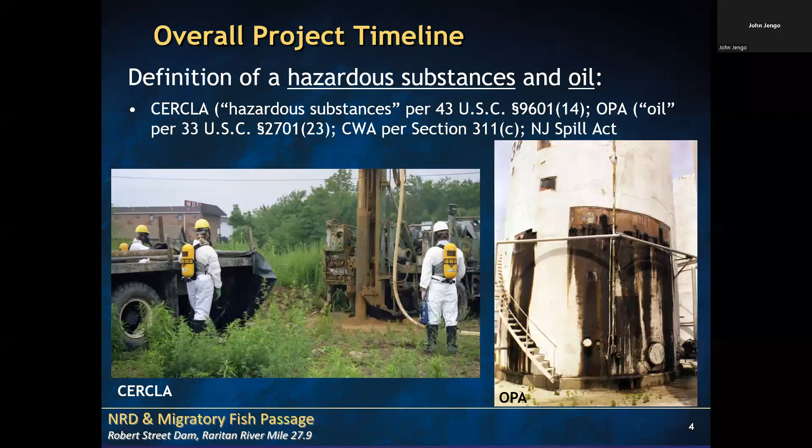So after about 10 years, and all you folks on this call have done this work yourselves, you know that if you've been investigating a 1,000-acre refinery or a 350-acre chemical plant, you know about 10 years in what your problem is and how you're going to resolve it.

Starting 10 years later in 2002, the remediation of these industrial sites began, which included finding thousands of drums still filled with tars and acids, shown to the left, and USTs to the right.

Drums that were burned and then buried, LNAPL, and also remediation trenches that I built and designed that separated the sites from the sensitive receptor. So now you're starting to get site containment.

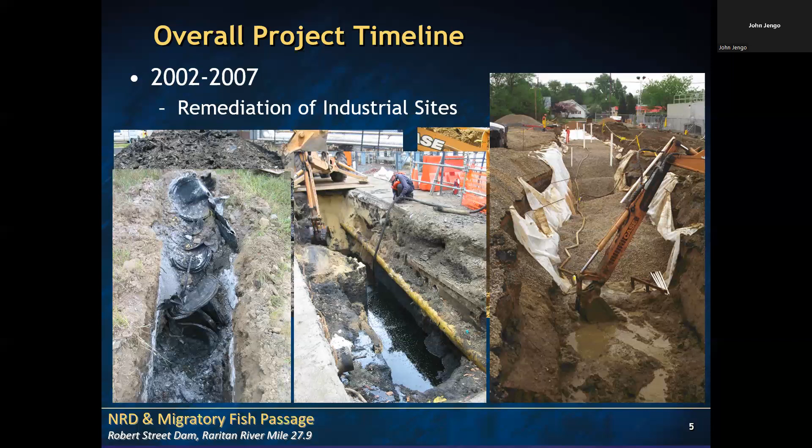It's only after you achieve that you really can calculate NRD. I've inserted these three images here to give credit to the team that has helped me in the first 15 years of this work.

To the upper left is Suzanne Eckel, to the right is Bren Welker, and to the lower left is Sophia Lee. These young women helped me enormously doing much of the field work as I worked with them. Without their work, none of this would have been possible.

I'm very gratified to say that each of these exceptional individuals still work in this business, but have gone on beyond my shadow and started careers running projects similar to these on their own. In fact, Sophia works for a major oil company, and Bren and Suzanne are project managers at highly regarded consulting firms.

So before I proceeded, I wanted to make sure no one person does this work. If you don't have a good team with you... I happen to be very fortunate with these three young women, who were equal members of the team and performed very arduous and difficult tasks. A lot of the success of the investigation and remediation were due to their efforts.

So about 2 years into the remediation, in 2004, I knew enough about how long that remediation would take so that I could calculate the natural resource damages. One thing about natural resource damages is it's ongoing right now, but you can't settle it unless you know when it's going to end, when the injury is going to end.

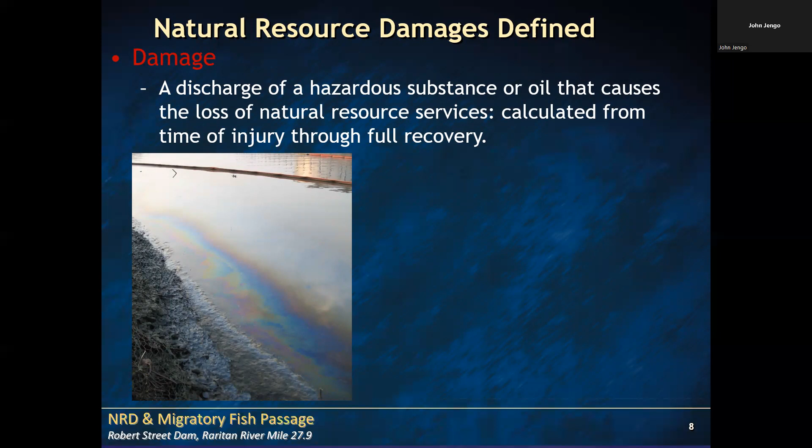But as a thumbnail, you start with the number of acres that were affected. Over time, that acreage increases in terms of what you owe the public. So if you injured 20 acres in 1915, you don't owe the public 20 acres in 2022 — it accrues over time. In this particular case, it was 383 acres owed back to the public, even though it originally started as only a 20-acre injury back in 1915.

I'll probably do another presentation someday on how complicated this formula is. But when I calculated this NRD, the federal and state trustees and I agreed that this was fair compensation.

So just to give you an example in acre currency: let's say 20 acres of wetlands were damaged in 1915. If I build or restore 383 acres today, that's compensation for the fact that those 20 acres of wetlands had been injured for almost 100 years. So time is a parameter in NRD.

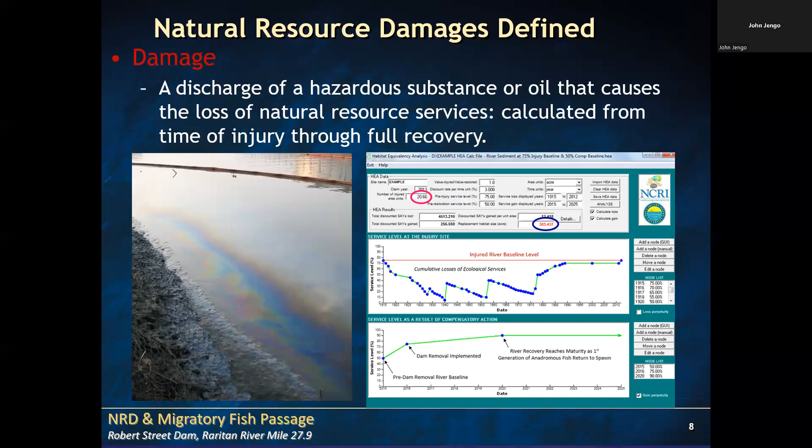So I wanted to get that out of the way because you may be wondering what that does have to do with dam removals. I had to give you the context of why these projects occurred.

In 2008, I spent almost the entire year, after we knew our sites were going to be remediated, trying to figure out the three NRDs, how we were going to compensate the public for this loss. For groundwater, the primary option is to purchase uncontaminated land and put it in easement. It recharges clean water in the same supply area as the contaminated site, compensating for that contaminated groundwater. The example I showed is that if we damage 20 wetland acres in 1915 and I restore 383, that's the primary way you compensate the public for wetlands loss.

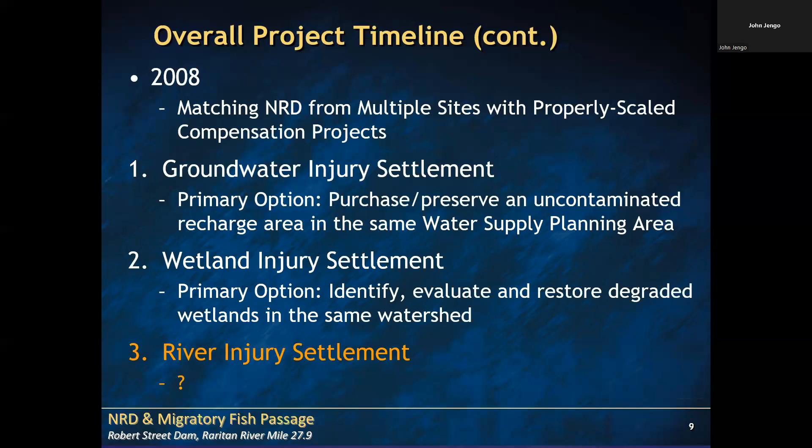But the river, this was a real puzzle to us. How does one settle a river injury? In 2008, nobody knew how to do this.

So I sat down with DEP, U.S. Fish and Wildlife, and NOAA and said, okay, my client injured this river in the 20th century. It's clean now, sediment's been remediated, the site no longer discharges. But I had 80 years, 70 years of damage, of discharges into this river of untreated chemicals. How do I possibly compensate the public for that injury?

We decided that reestablishing anadromous, which is migratory fish passage in an unobstructed river into their historically significant spawning grounds, would be the action that would provide the greatest uplift. It turned out that dam removals would be the mechanism to restore a river and get that ecological uplift. In the next slide you'll see that the dam miraculously disappears, and in theory, migratory fish would return.

So here's some interesting quotes. If you're not familiar with dams, we all know the benefit of dams. Why? They generate hydropower. They might be the place where your water company extracts water from. They might, in the west, not the east, serve some function of flood control. But they do more damage than good. Most dams do more damage than good.

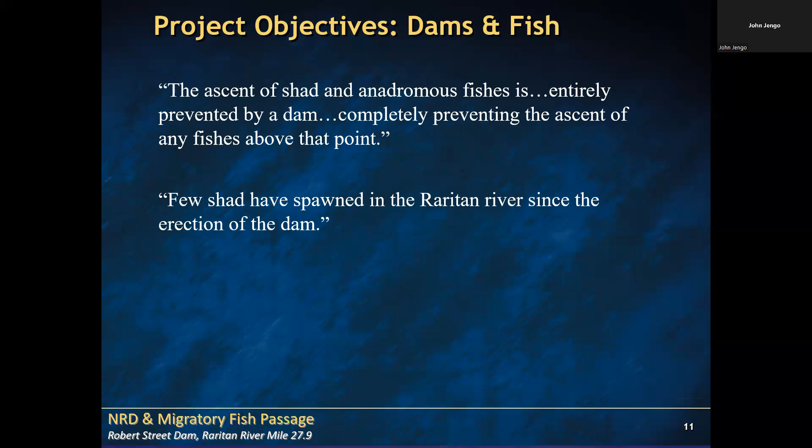So here's an interesting couple of quotes from a report. The ascent of shad and anadromous fishes is entirely prevented by a dam, completely preventing the ascent of fishes above this point. Few shad have spawned in the Raritan since the erection of the dam. The chief cause of the local extirpation of fish is the erection of dams impassable by anadromous fish returning through their spawning grounds. Now, you might think this was a report I wrote in 2008 justifying dam removals.

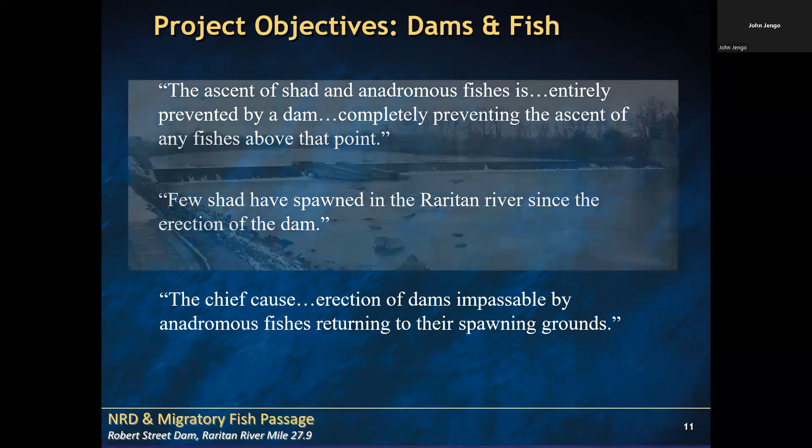But in fact, these words were written about this dam in this report from 1872. So it was recognized 150 years ago, the negative consequences of dams.

But in the industrial rush to improve life for the citizens of this country, dams were built almost without thinking. It's been said there's been a dam built every day in this country since the signing of the Declaration of Independence. The number of dams, depending on how you define a dam, whether it's a weir, or 5 feet high or lower, there's been at least 350,000 dams in this country and perhaps over 1 million river obstructions, which include culverts.

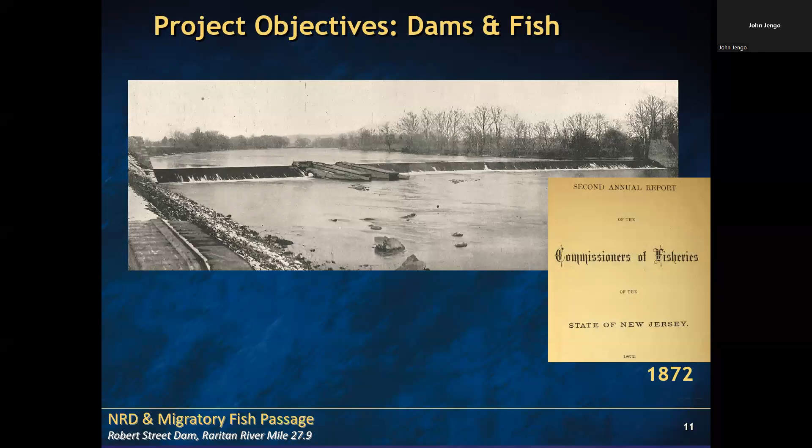So what are the advantages? How did we justify to the trustees that a dam removal would do the thing they wanted, which was to compensate the public, the citizens of New Jersey, for the damages from my client's sites?

And then the next animation.

Number two, you restore the river's processes for natural deposition, its flood flow and its water chemistry. You no longer have deoxygenated impoundments, but you have high DO water, flowing water that is not accumulating a lot of phosphates and nitrates in still water.

Next animation. You're also, when you clean that river and get that river flowing again, you restore riparian habitat and increase biodiversity. I can tell you that every time we took a dam down, the birds showed up that afternoon watching us, wondering if it was finally going to bring the river back to life. We've noticed almost a tripling of bird populations in the former dam impoundment since these dams came down.

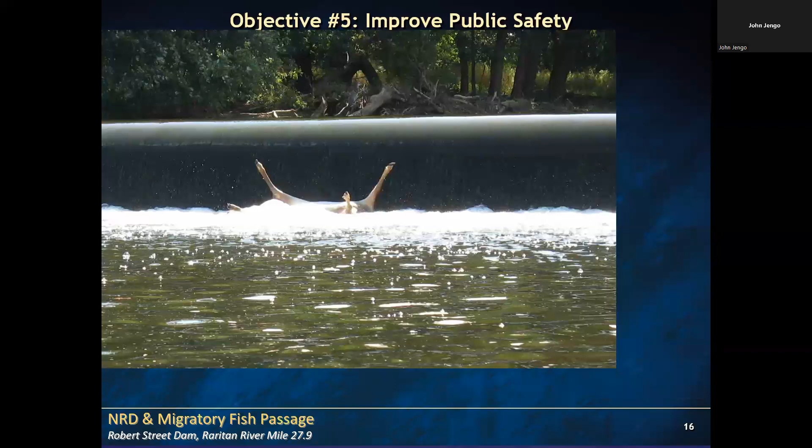And then lastly, this dam, the Robert Street Dam, which we're going to talk about in just a few minutes, had a number of human fatalities during the time I was studying the dam and when it was rebuilt in 1964. And then this deer went over the dam one morning that I was there, and there was no saving it. So this is a good example of these low-head dams being drowning machines, and it's very difficult to extricate yourself. The dam I'm working on now had 7 fatalities. The Robert Street Dam had 3. Some of the other dams I took down had at least 1 or 2 fatalities in the historical period. So we are also improving public safety.

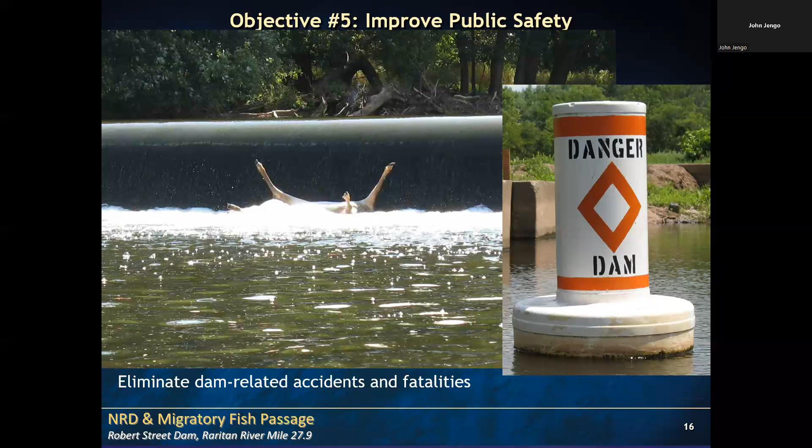Next slide. So where are these dams? The 4 that I've done and the one that I'm working on now.

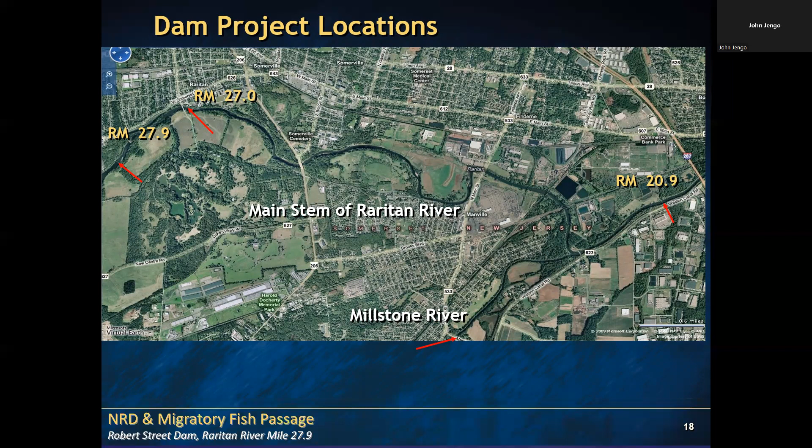So the first dam on the Millstone River was the Weston Mill Dam. You can see a picture of that dam to the upper right.

The lowermost Raritan Dam was the Calco Dam. It was actually a weir built by American Cyanamid to discharge waste dye into the river, but it served both as a dam and as a weir.

This is the Nevius Street Dam, built in 1901 by James Buchanan Duke of Duke Farms. He built it to run a power station, which is just out of frame of the picture.

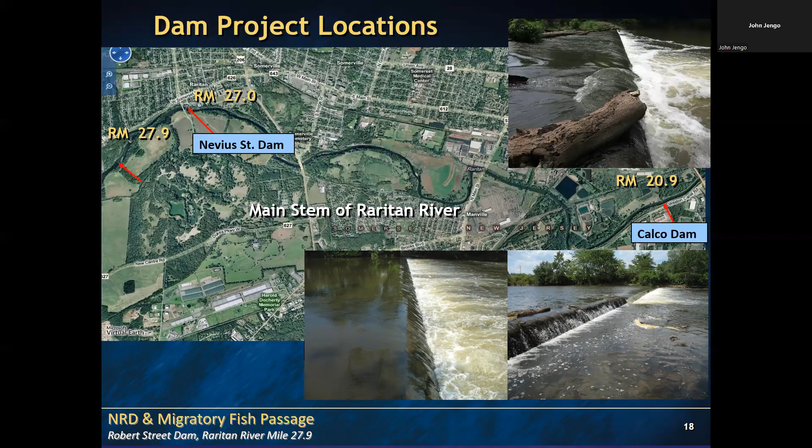And then the topic for the rest of this afternoon will be the Robert Street Dam here. There's also a Headgates Dam, off frame to the left, that I'm working on currently. So I'm going to show you the status of each of these 4 dam removals, but we're going to spend most of our remaining 30 minutes on the Robert Street Dam, to the lower left.

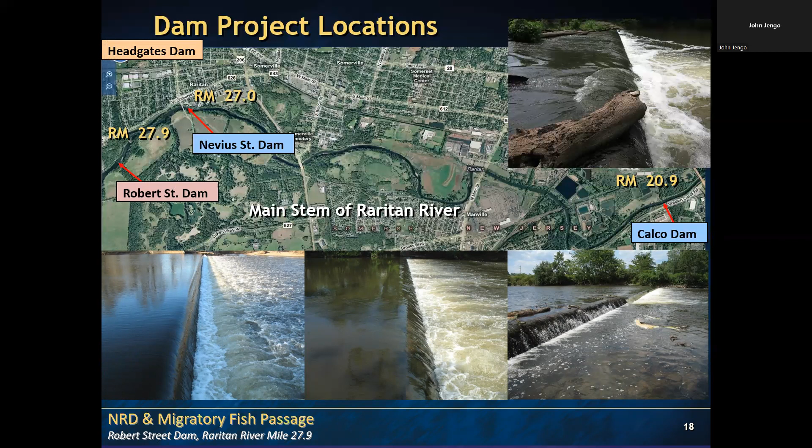So I just want to give you a snapshot in these slides of what the last 5-year process looks like. In year 1, you're identifying the dam, trying to figure out who owns it, which is trickier than it sounds, and also trying to figure out whether it's feasible to deconstruct it.

In year 2, you're spending a lot of time monitoring the river. You need to know its behavior to try to pick a time when you might be able to do the demolition. You're also sampling sediments behind the dam, surveying the dam, and surveying the riverbed at this time.

In year 3, you're doing a lot of your analysis. You have to notify every landowner on the impoundment, which sometimes can be hundreds of homes. You're also modeling the river because you have to figure out the ideal flow to breach it.

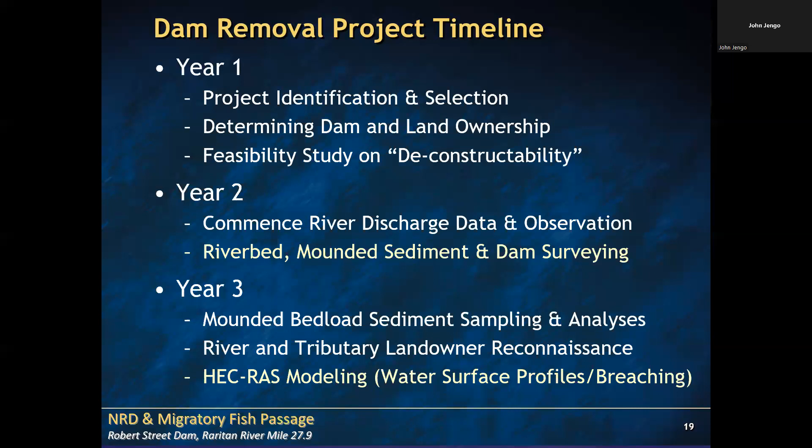One does not breach a dam on any given day. You want to breach it at low flow condition to minimize sediment moving through the breach, and to make it safe for your contractor to be in the water. The modeling involves building a model of the dam and river that predicts how much sediment and flow goes through when you breach it.

Year 4 is about getting agreements with the dam owner. Sometimes I have dams no one wants to claim ownership of, so we make them sign a quit claim deed saying that even though they claim not to be the owner, we think they are, but they must allow us to take down the dam and not make us put it back if it turns out they own it. We do this because no dam owner wants to be on record as the actual owner, since they understand the liability.

You're also trying to figure out how to get to the dam with 40-ton equipment. And of course, as in all your projects, you're applying for permits, doing public notices, and doing historical research in that year before the demolition takes place.

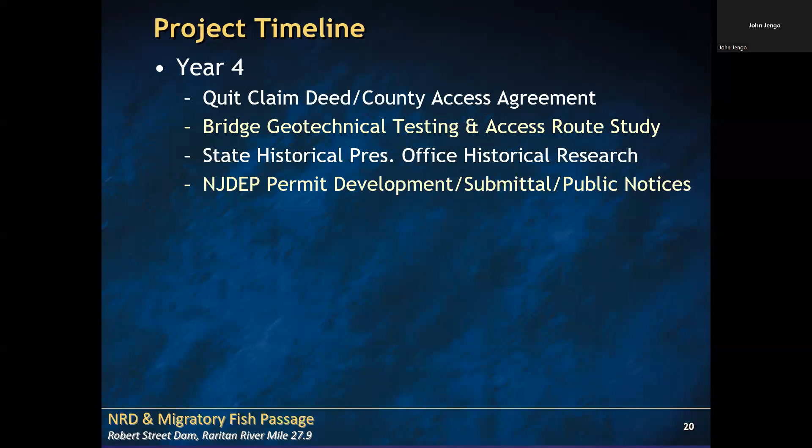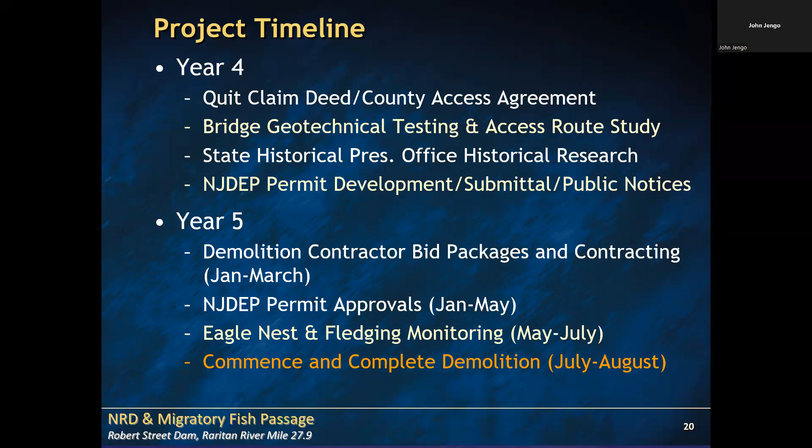In year 5, you're bidding out your contractors and getting your approvals. Many of my dams have an eagle nest nearby, so we have to make sure the eagles fledge by mid-July, and then the demolition typically happens in year 5.

So now we finally get to talk about the dam I wanted to show you today. This is the Robert Street Dam, actually called the Dead River Dam when it was built in 1915 because of what it did to the river. It was somewhat robustly replaced in 1964 when the dam failed.

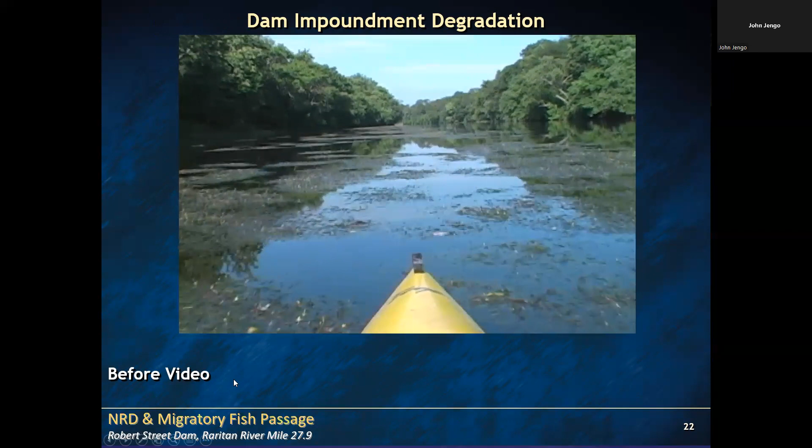This is me in the impoundment of the Robert Street Dam a year before the removal took place.

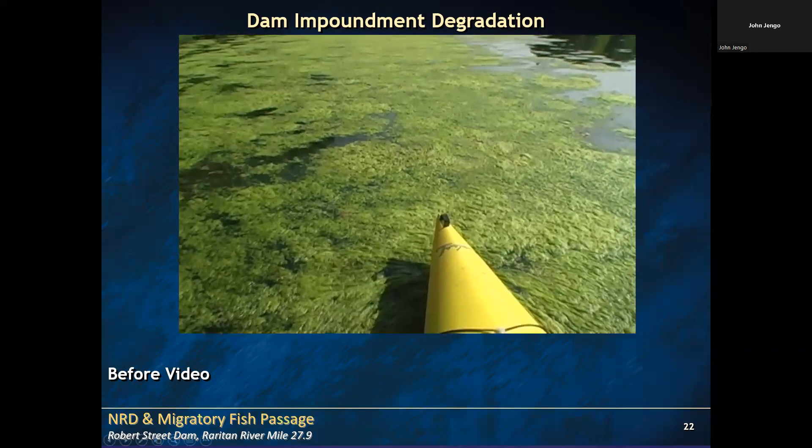This is what's covering the surface water right now, filamentous and other mat algae. This is simply not a very healthy condition for a river to be in. This literally didn't flow, and it got carpeted with this algae. What you really want, and what fish really want, is open water like this.

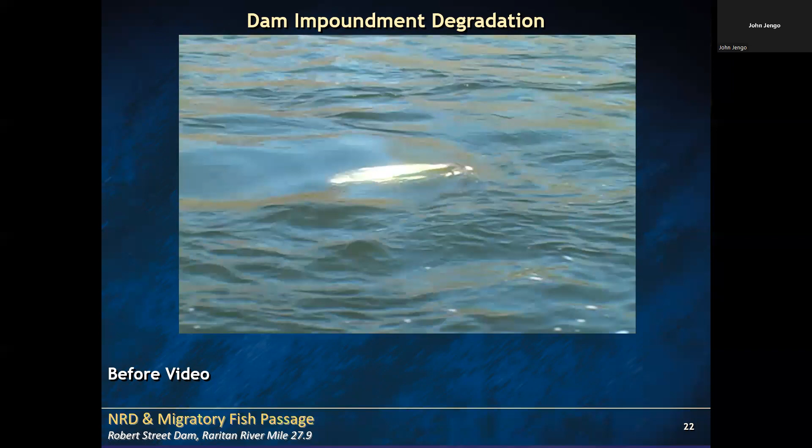In this last video, look at the bottom of the screen. You'll see a shad attempting a jump, though it didn't play very well. Many shad would get up to this dam and not be able to crest it. Shad cannot jump over obstructions this large.

In trying to figure out how to take down this dam, you try to acquire as much information as you can. There are really no as-built plans for dams this old, so you're doing a lot of surface observation. I also cored the top of this dam to try to figure out what was beneath it.

Of course, you can make a lot of observations when looking at the dam. I found a picture from 1964 in a newspaper of what the dam looked like, which told me a great deal about how they built it.

I could walk out onto the dam at very low flow and see a cutoff wall on the upstream side, a series of sheet piles. That told me we had a big challenge in front of us, because all of those sheet piles would have to be removed. We had no depth information on these sheet piles, but we knew they probably went down into bedrock.

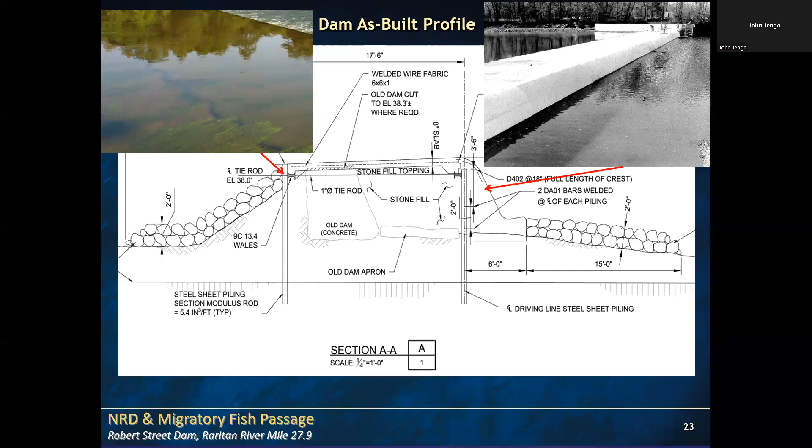This is a picture from a consultant report I obtained from a consultant, from 1963, of the original dam, the Dead River Dam, that had sunk and failed in 1963. I could tell, even in a picture of this quality, that it was also a concrete dam. So that prepared me to do a double dam removal.

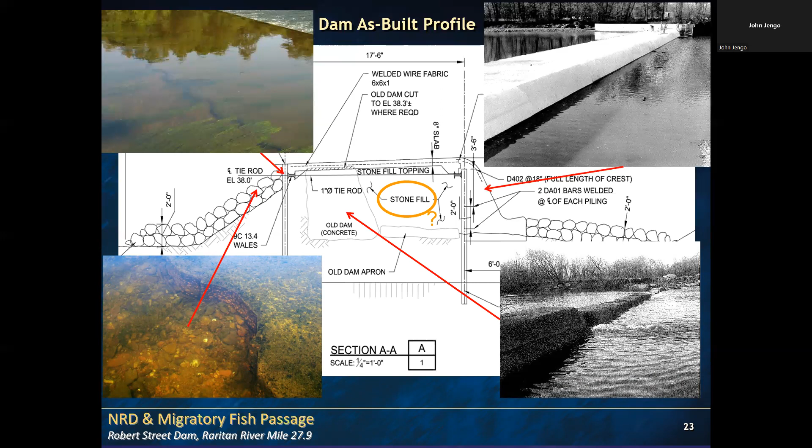I could see where riprap had been placed on the backside of the dam to ramp up and get water over the sheet piles. But there are things you don't know. No one could tell me the composition of this stone fill, so I had to be flexible as soon as we broke into it, deciding what to do with it.

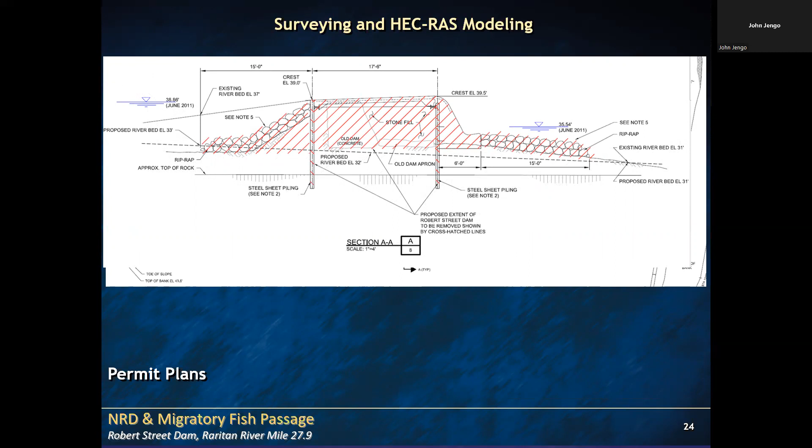I did a cross-section profile of that same cross-section to show the agencies what I was planning to remove and the grading I was going to do through the dam.

The river surveying you do upstream and downstream of the dam tells you where the river thalweg is. It no longer exists at the dam, but it tells you how to connect the two thalwegs together to reconnect the river. That's why you survey the river up and downstream, to figure out the geometry of what it used to look like so you could recreate it when you remove the dam.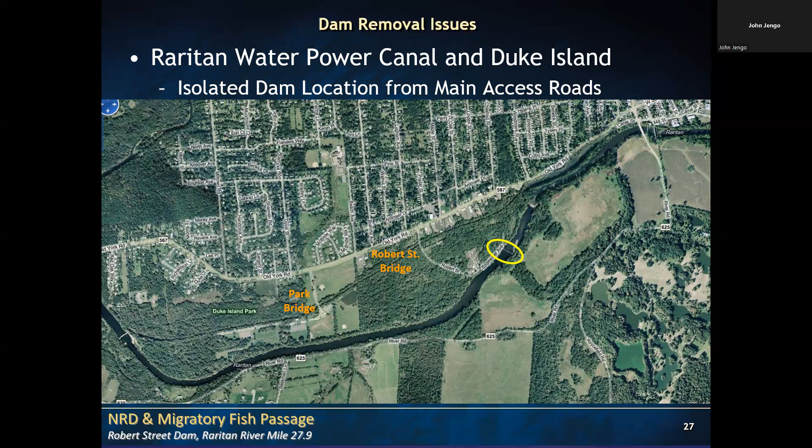Unluckily for this dam, there was virtually no way to get to it. There was only one road, where you see Robert Street Bridge, and this bridge was not capable of supporting the load from our equipment. Getting to the dam—I know this might sound odd to say it's in a remote location in Somerset County, New Jersey of all places—but there was only one direct road to get here, and we couldn't use it for reasons I'll explain next.

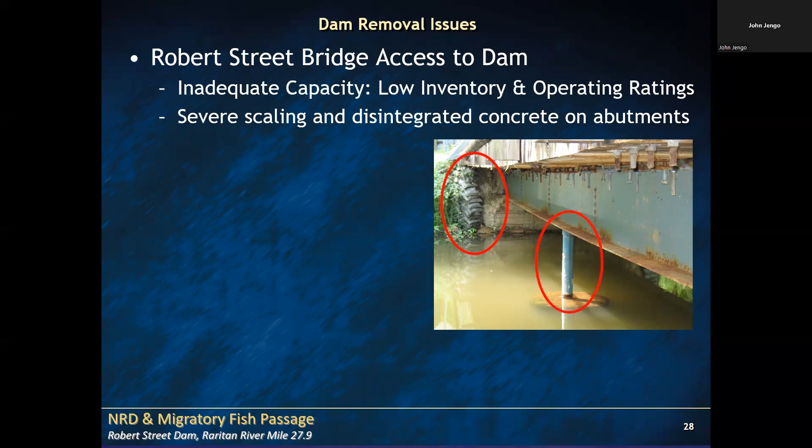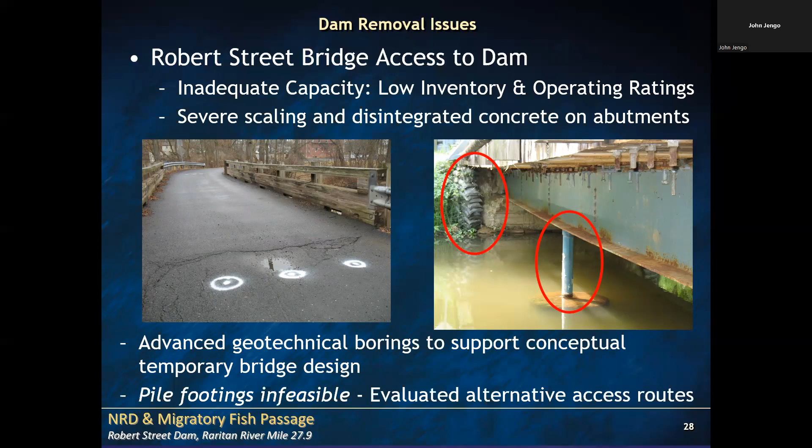So this was the bridge. I'm not an engineer, but one look at this and I realized there wasn't any way this bridge could hold a 40-ton excavator. They were sandbagging the abutment, with a hollow metal pipe on a concrete pad—which, by the way, this is a canal—that wasn't even attached to the base of the canal. I did a lot of geotechnical borings here and realized this bridge could not hold the weight of the excavator. So now I have a problem on my hands.

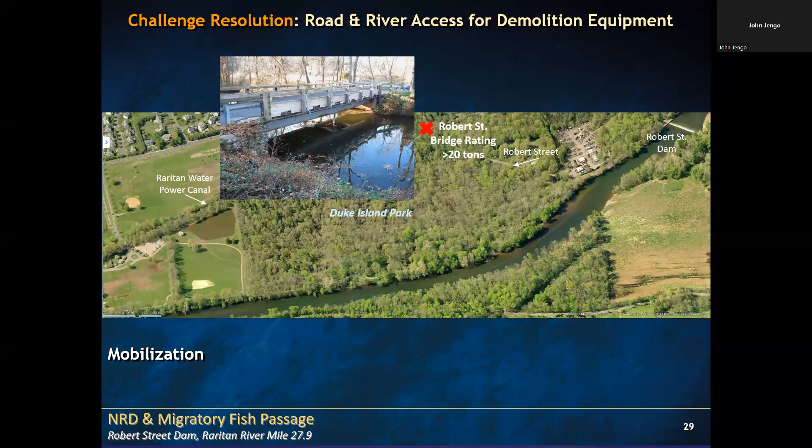I've gotten permission to remove the dam, but I have no way of getting there. I've already shown you this bridge, which can't be used. You might think about the real estate next door on the other side of the river, but there was no road. The bald eagle's nest was there, and we'd have to cross under PSE&G power lines, which they would not allow us to do.

Luckily, there was another bridge in Duke Island Park that was rated for 63 tons. So I was able to take that, and this was all pre-planned. I'm showing you the end result: we were able to ride the excavators down the pathway.

Where you see that yellow arrow stop, you might be able to look in the river and see some brown sediment on the north margin. That's actually a sandbar I surveyed over many months, and realized that at a particular water depth, our equipment could ride on that sandbar and get past that pedestrian bridge, which was blocking our way, and get to the dam.

And that's what it looked like. We made it by a few inches. I walked ahead of this excavator and said, if you see the water go over my head, don't stop. We were able to do this—you normally don't approach a dam on the impoundment side because the water is too deep.

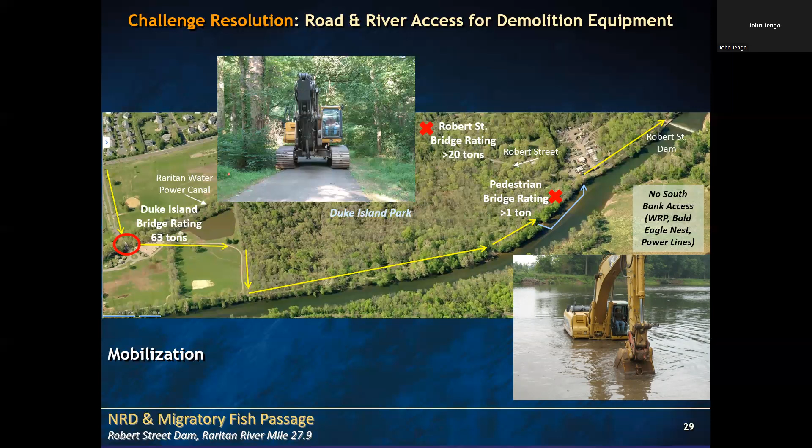I'm going to return to this sandbar later on to show you what became of it. But I just wanted to illustrate that every dam removal has challenges, but if you work a problem long enough, you'll be able to come up with a solution.

Now we get to the fun part, the latter portion of our presentation, where we talk about how the dam removal happened.

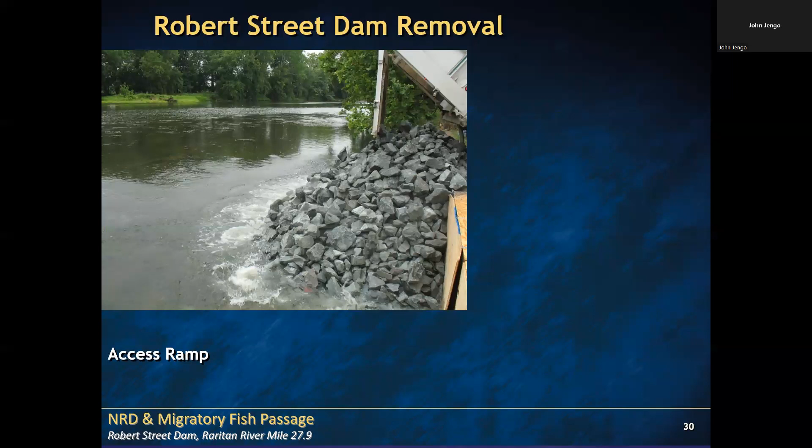First, we had to build an access ramp to get onto the apron of the dam, and then we rolled our excavators out on the appointed day, when our breaching calculations said that at this particular flow, 280 CFS, we could breach the dam safely.

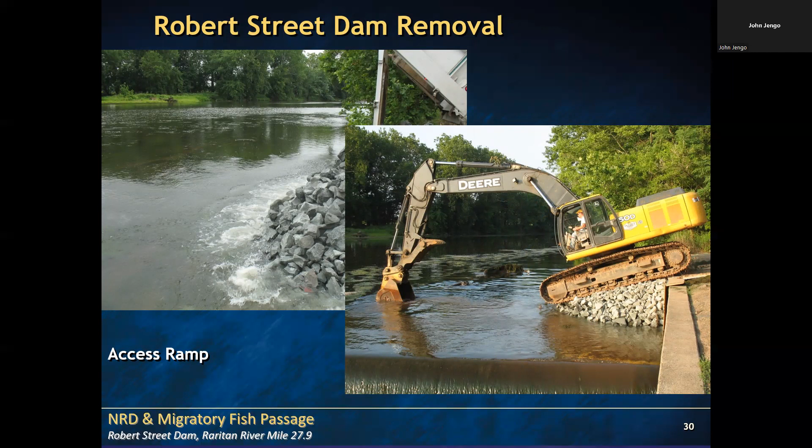We took our 2.5 ton, 60 BPM hydraulic hammer and began to hammer away at the concrete. Our objective for this day, since you have to breach in a single day, was to uncover the sheet piles and either remove them or bend them downward to begin the impoundment draining.

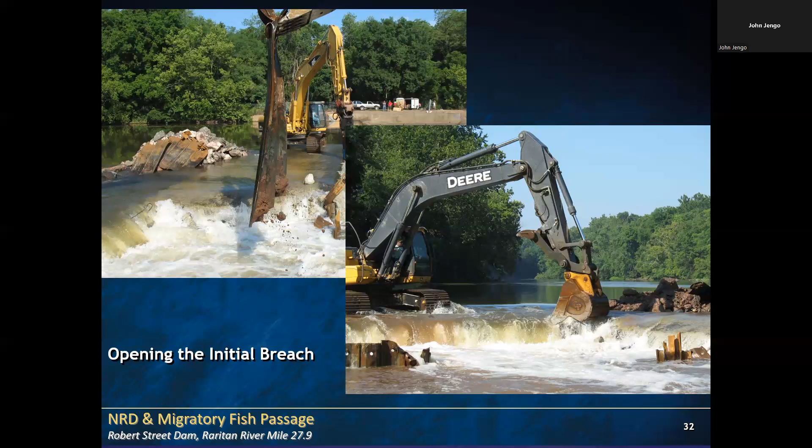I actually used those sheet piles as weirs to govern the flow and discharge, which really kept sediment from discharging out—that's what dam safety was there for. They wanted to make sure we weren't discharging so much sediment that had been impounded upstream that we were covering habitat downstream.

After the initial breaching is over, you work for the next couple of weeks to widen the breach. Our objective here was to remove the concrete to get at the sheet piles, because as you'll remember from the drawing I showed, sheet piles formed both the cutoff wall on the upstream side, and also supported the dam crest on the downstream side.

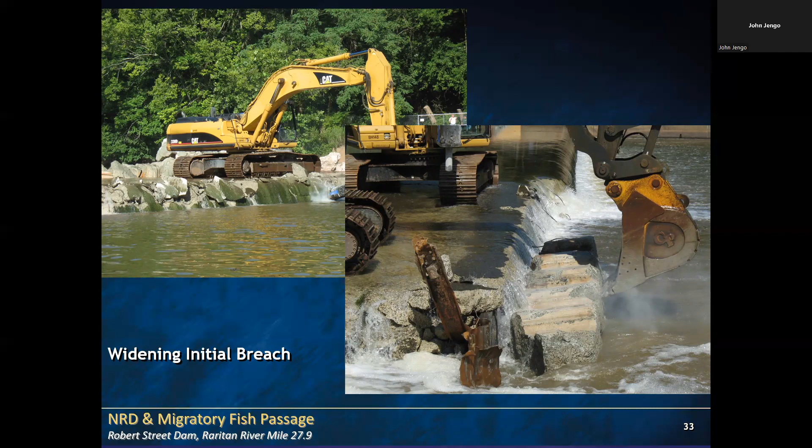We also did some freshwater mussel rescue during this time while those guys were breaching the dam. We actually found some adult freshwater mussels that we relocated into the water to save them for future reproduction.

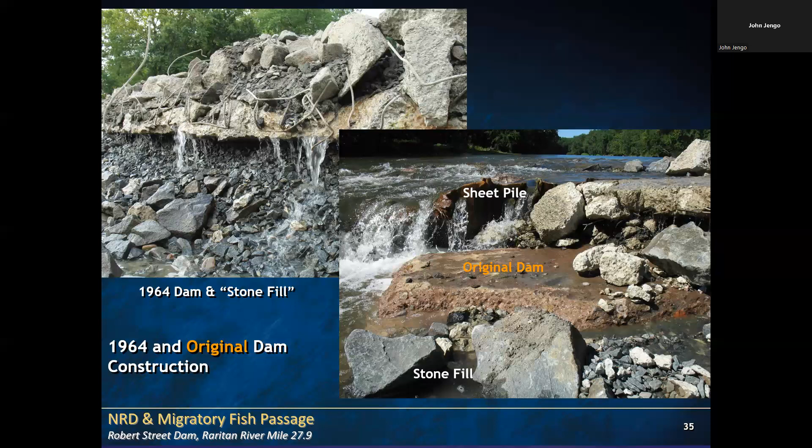And there, finally, I lay eyes on the stone fill. I now know it's R4 size rock, running from 12 inches to 24 inches. Now I have a few days to think about what I'm going to do with that rock now that I know what it is.

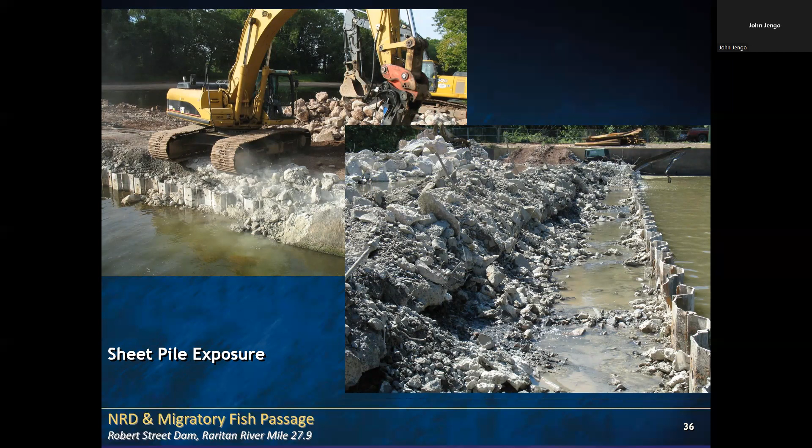So this is the most critical stage. We have to get these sheet piles out, or it's not really a dam removal. So we spent 2.5 weeks uncovering the sheet piles on both the upstream side and the downstream side.

These were U-shaped piles with Union straight web section interlocks. Now, they weren't grouted. I know it looks like there's grout in there, but that was actually grout from the concrete apron. They were not grouted in place, just simply driven into place.

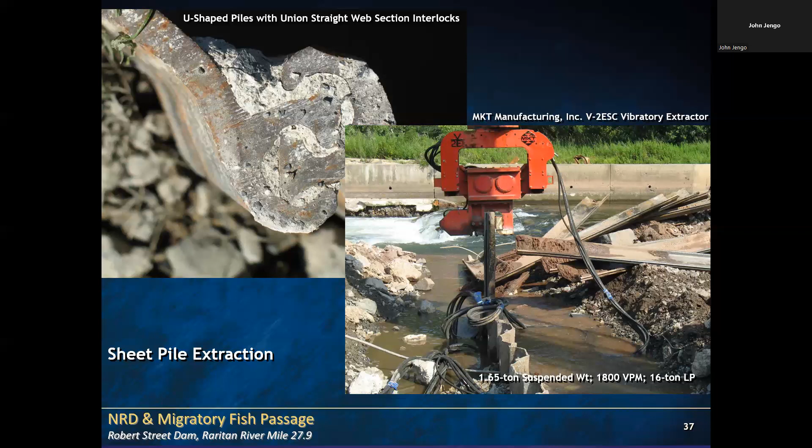I don't want you to think that everything went perfect on this job. Nothing ever does. I will tell you that when I spec'd out this 1.6 ton suspended weight vibratory extractor, which had a 16-ton line pull, I came to find out very soon that that was woefully undersized.

I had to upgrade to a model 1123. We needed a much heavier unit, because the way you break the seal is you literally drop the extractor on the sheet pile to break it, and it had to have at least 2100 vibrations per minute and a 40-ton line pull. These sheets don't weigh 40 tons, but they are driven into bedrock, naturally cemented into bedrock, and rusted shut in their interlocks with every other sheet pile. So it took a 40-ton line pull to pull them.

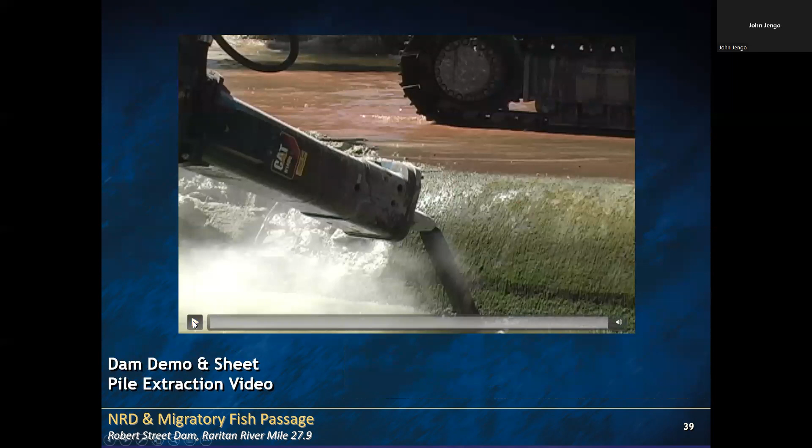If you could play this, I know it might be jumpy, but you should still get a flavor of the deconstruction. It also had audio, but I don't think you can hear that.

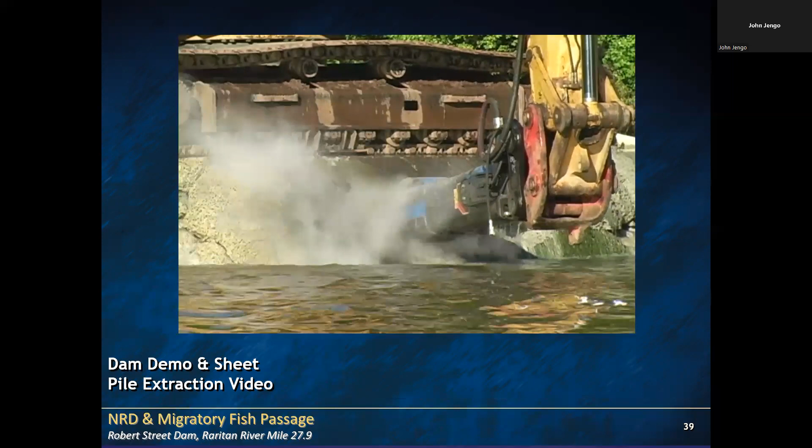So here we are demolishing the dam crest. If you could hear the audio, it's a loud rackety pounding of the rock as this hydraulic hammer slams into the concrete and shatters it. It's quite an impressive process, and laborious too.

So what we're doing here is exposing the 1964 sheet piles, because we're not going to be able to grab onto these sheet piles with the extractor until we can get about a foot grip on them. So we had to strip the concrete off of both sides of these sheet piles.

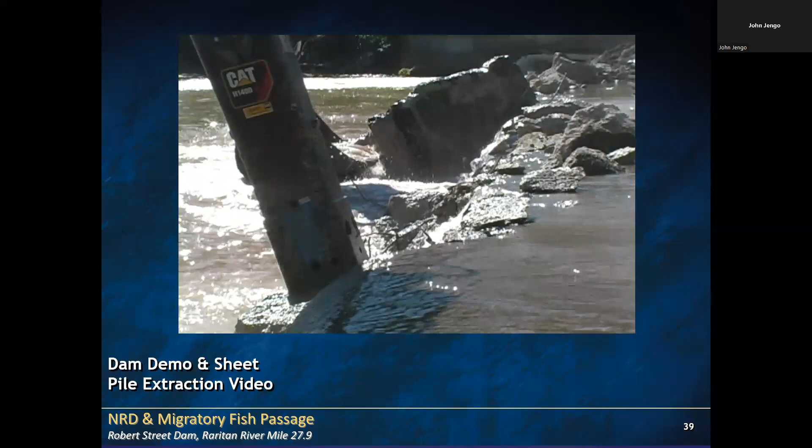Now, by the way, what are we doing with the concrete? Well, we're taking it out in really large sections, because I made a commitment to DEP dam safety that I would not leave an ounce of concrete in this river because it didn't belong there.

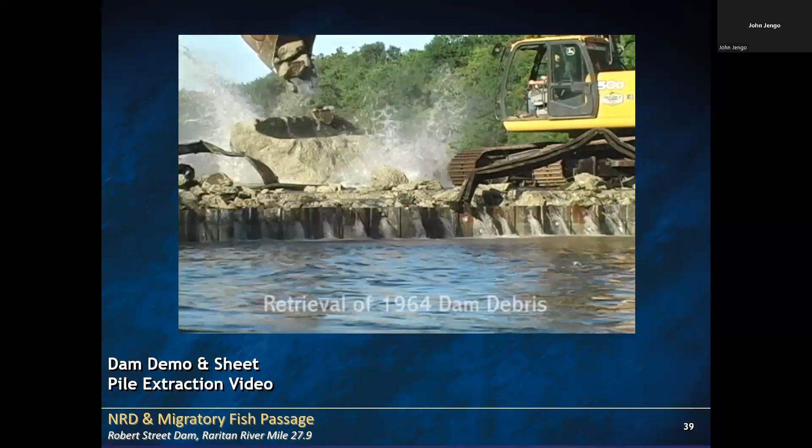You are allowed to petition to leave concrete in, but I didn't think that was going to look very good. So I made the commitment to not only excavate the rock fill, which you see us doing here, excavate the original dam, but make sure that all of the 1964 concrete got removed.

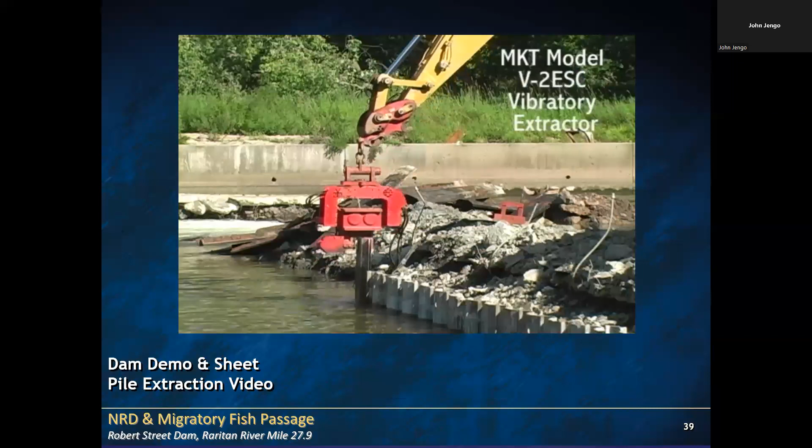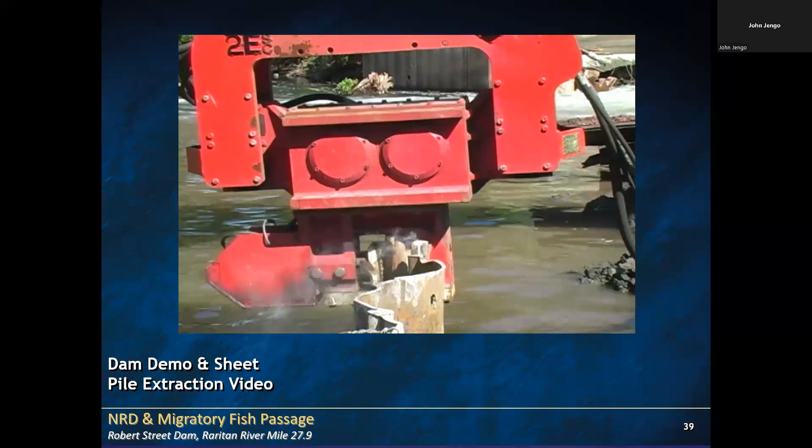And this vibratory extractor started doing a pretty decent job. However, if this video were to run, you would see that it's now straining to try to break the seal on these sheet piles. We didn't want to burn it out, so we knew by day 2 that this extractor was not up to the task.

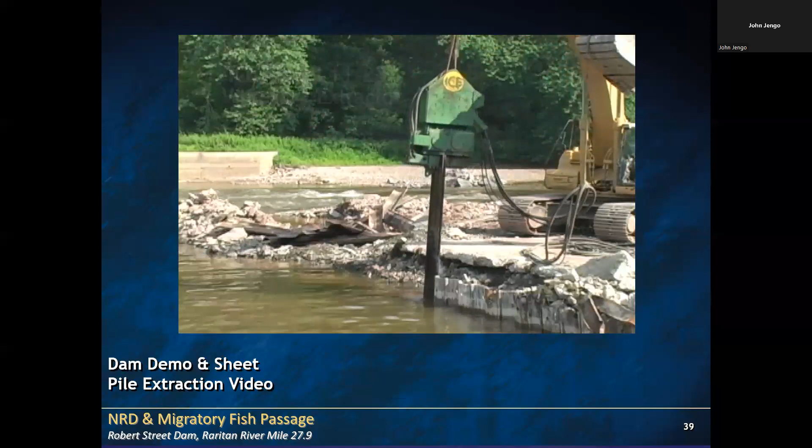So we brought in the 1123, and it made very short work of these sheets. I have a zoom in here, but you can see that sometimes the metal would actually go molten before the seal was broken. That's how attached they were.

As this sheet comes up, you're going to see a lot of red sediment on the bottom. That's bedrock that had cemented to the sheet. We're literally breaking rock. The adhesion to the sheet was stronger than the rock to itself.

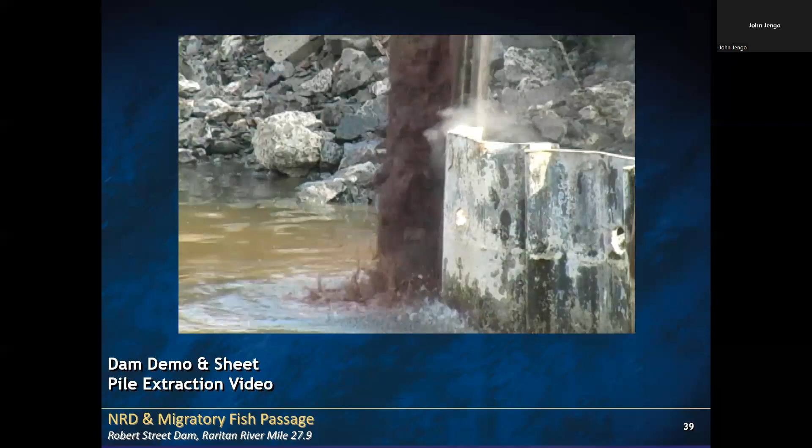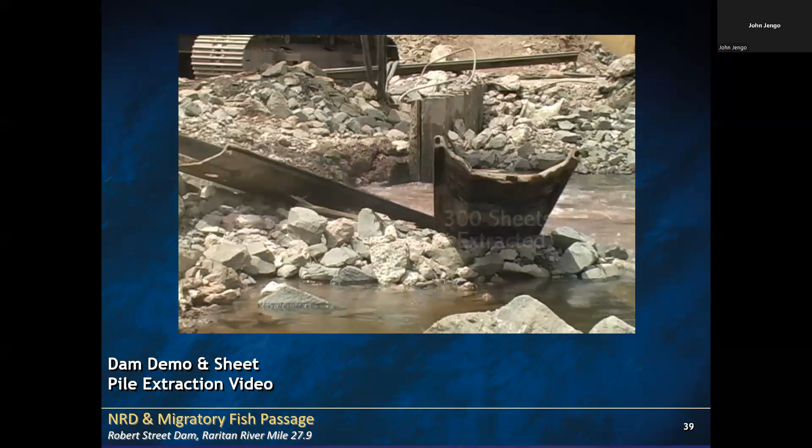Which is why much of the 5 weeks it took to remove this dam was dedicated to removing these 300 sheets. I know there were 300 because every one was a struggle to get out. And so we pulled out all 300 sheets. I left sheets up against the 2 retaining walls as an anchor, but all the other sheets came out.

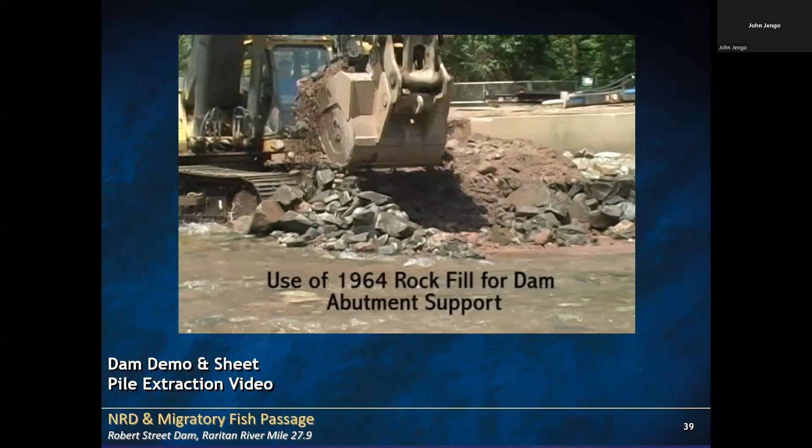By this time, I knew what I was going to do with the rock fill. I was going to use it to support the walls that the dam owner wanted to keep for bank stabilization. So I found a way to repurpose that rock.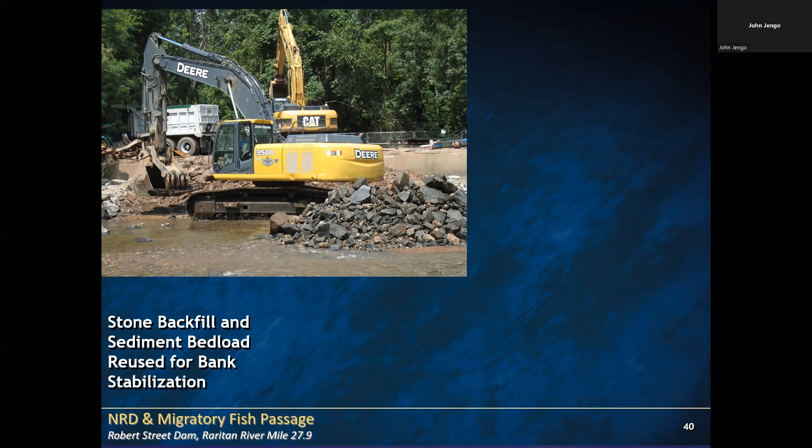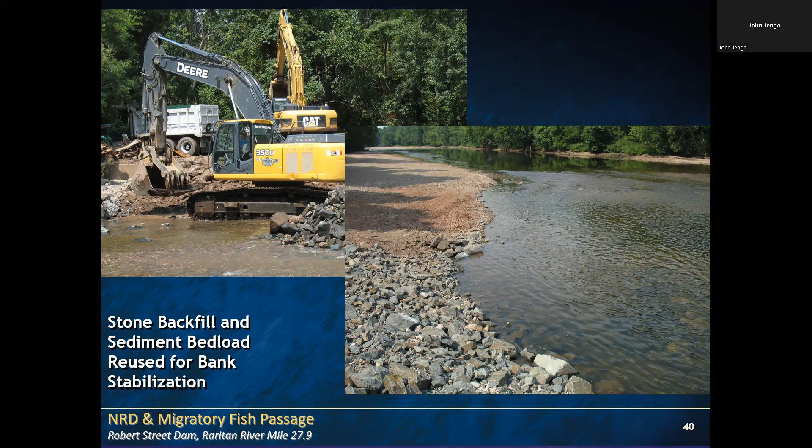As I just said in the video, I repurposed the rock fill and rebuilt the shorelines. You may know that dams scour out the shoreline upstream of the dam. They create coves, so we used the rock to rebuild the shoreline.

Now you might ask, I do have some removals where we are responsible for revegetating the riparian zone. We didn't have to do this in this particular case. It actually reseeded itself within a year. So that's the same view a year later. The river comes in, carries so much mud and so many seeds that basically we didn't have any exposed surfaces a year after the dam was removed.

As I said, I made a firm commitment that I wanted people to go to this location and ask, what dam? Where was it? And the way that you do that is you clean up after yourself. So I made sure that every piece of steel that we got out and every ounce of concrete was shipped off and recycled, not disposed of.

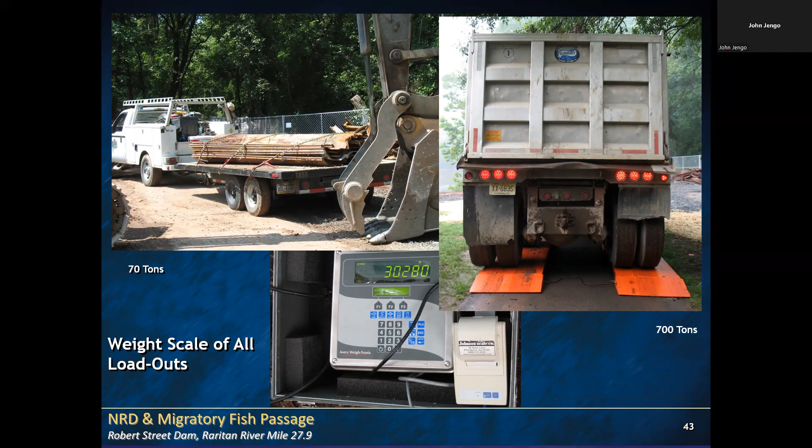I'm rather fastidious about this. I wanted to know exactly how much we moved off. So I can tell you we moved out 70 tons of steel and 700 tons of concrete. They got recycled at a metal recycling facility and also at Boulder's concrete recycling off of Route 22.

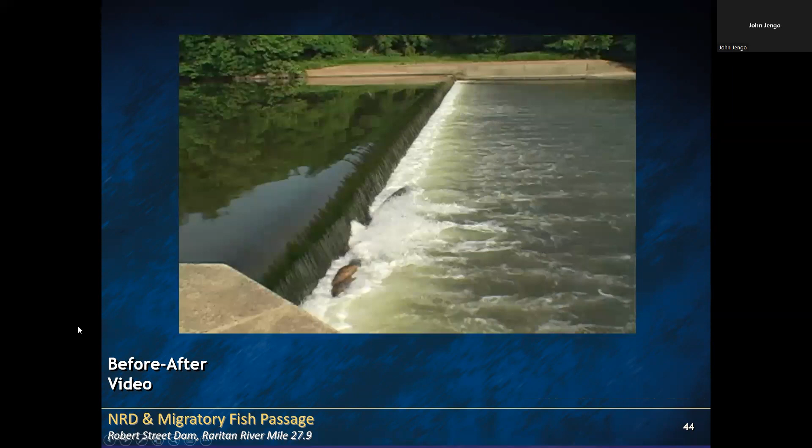This video is very short. It's a before and after of some views of the dam. It may be jumpy, but I still think you'll get a flavor of what the before and after look like for this particular dam. So this is a view from the south bank looking north when the dam is gone. And then I have a couple downstream camera positions that I had set up, and the video makes it look like the dam vanished. It really becomes a different river, completely transformed.

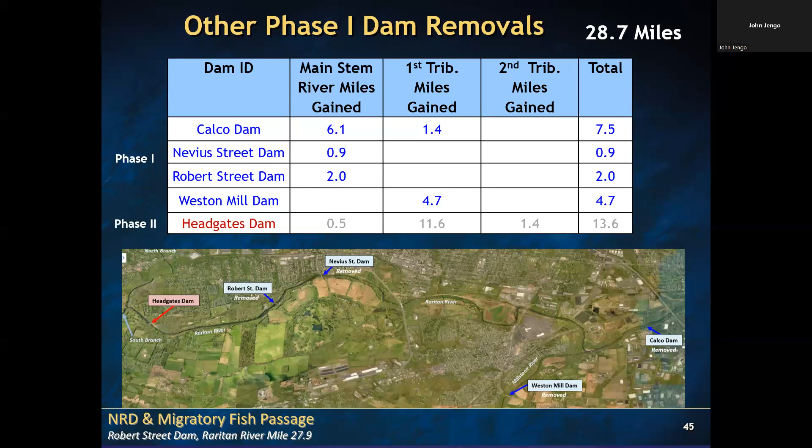Just a quick snapshot of the other projects. This is the Calco Dam, the furthest one downstream.

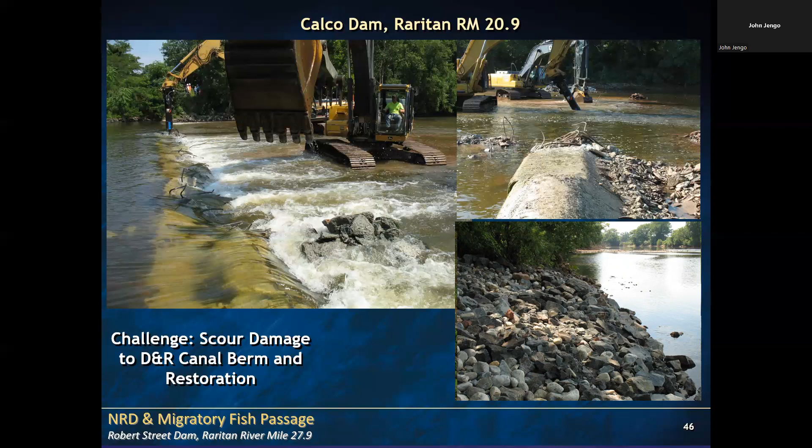Every project has some other ancillary benefit. So how did I get the owner to agree on this dam? Well, they were partially owner of the Delaware and Raritan Canal, which you see to the left in the lower right photo. I demonstrated to them that the presence of the dam was scouring into this berm that had been built in 1833 that was being used for water supply by New Jersey American Water. So I made a commitment to them that not only would I remove the dam, I would rebuild the berm for them and give that another, hopefully 150 years of life. So they found that to be a win.

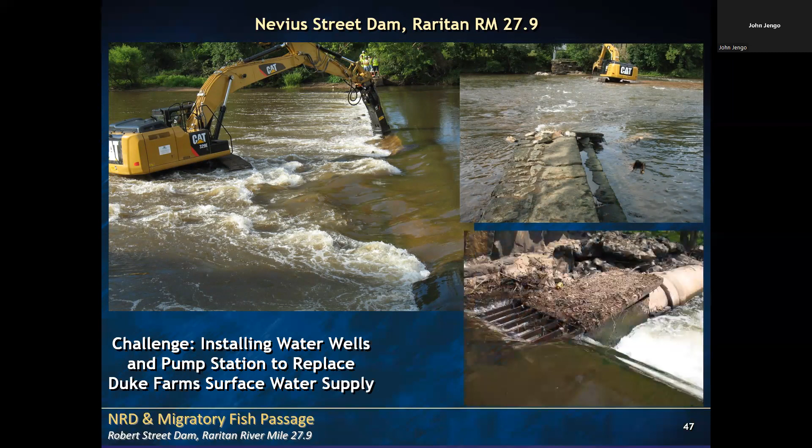This is the Nevius Street Dam that Duke Farms was using for water supply. This was the intake that you see here to the lower right. Once the dam came down, the intake essentially went dry. So how did I remedy these folks? I designed and constructed 2 water wells and reconfigured their groundwater system on the facility, and replaced their surface water with groundwater.

Not only was it more reliable, it didn't have the phosphates and nitrates that were fouling their lakes with algae. So how did Duke Farms win? Well, they got rid of a liability, just like the Calco Dam owner, but they also got better water quality for their lakes, a more reliable system, and now their lakes are improving, as is the overall habitat. So again, these projects work because everybody should win on these. Duke Farms got rid of a liability, but also got a better water supply in exchange for their agreement to allow me to remove this dam.

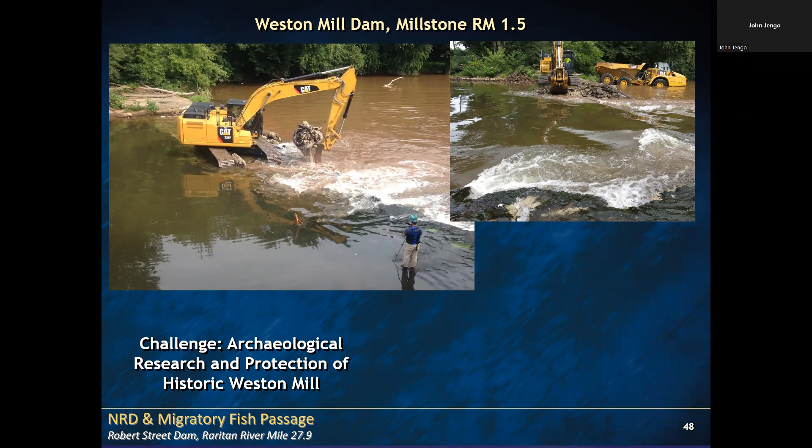Next slide. The last example I'll show you is the Weston Mill Dam. I did this only a few years ago. That's me standing on the impoundment. This dam was originally built in 1747, so I had a lot of SHPO work that I had to do to justify the removal of this structure. It was on the verge of collapse, which kind of helped my case. This was a beautiful mill that had been here, but it had burned down in 1993.

But I was able to promise that after the dam was removed, I would do an archaeological recovery of the dam and the mill, and then I would put scour protection around the mill foundation and preserve it for future generations. One of my true pleasures was writing a 100-page report on the archaeology of this.

It was so fascinating to review the history of this mill. It's the first dam that SHPO has allowed to be removed in New Jersey that had a prior life as a grist mill. I'm not suggesting all of them should be removed. In fact, there's one at Clinton that is not in shad habitat that should remain because the mill is still there. However, this will open the door for other people who are looking at old grist mill dams and removing them, because yes, the dam is gone, but by removing the dam, you save the mill structure from flooding and damage. And so the exchange in SHPO's minds was worth it.

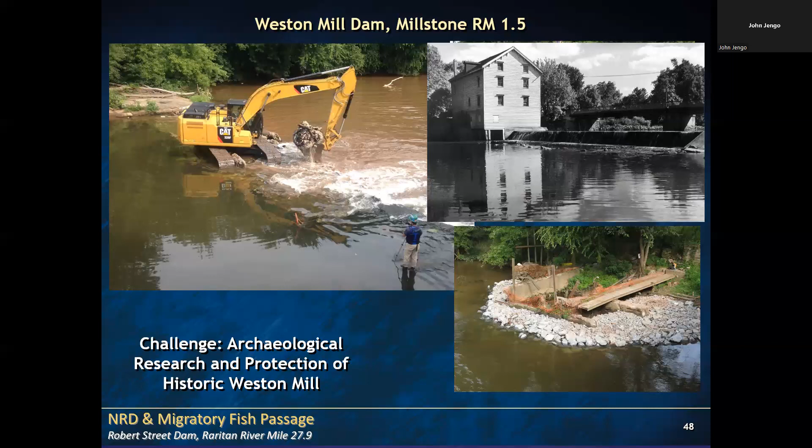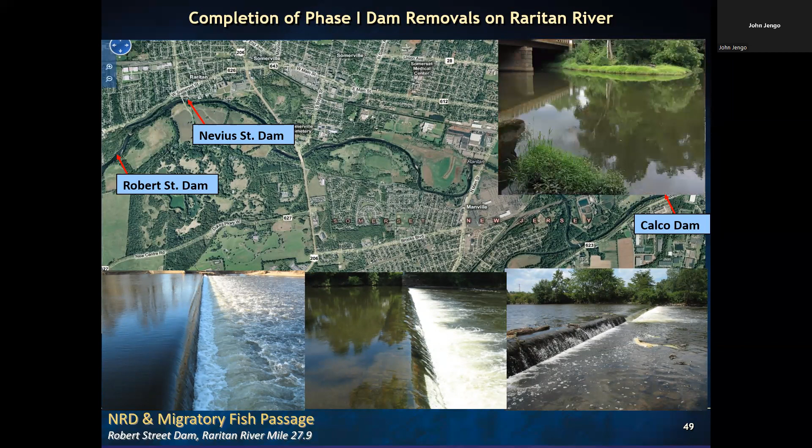Next slide. So we're just going to revisit this slide, I showed you this earlier. If you look to the upper right, that was the Nevius Street Dam, and now it is gone. And if you look to the lower right, the Calco Dam, and advance it, in the middle picture, and advance it one more time for the Robert Street, which we just spent this afternoon speaking about.

So you might be thinking, okay John, looks good, I guess. How did it turn out? I have to caveat this because you might suspect that shad populations have a lot of other factors involved, including whether or not someone's fishing for the shad offshore. But taking all these factors into consideration...

There is an order of magnitude increase in shad and herring that are moving upriver. To this day, I still get anglers sending me pictures of shad they are catching where the former dams were. The newspapers have given us excellent coverage, really fair and honest coverage, that the results of this work have improved the habitat of the river.

I have a sewer line behind the dam. Remember I said every dam had its challenges? Well, I have a sewer line behind the dam that I have to move that's actively being used. This has three rows of sheet pile and there are different configurations, so I'm currently figuring out how to remove those.

The dam was built in 1842 to put water into a canal, the Raritan Power Canal that flowed down to the borough of Raritan. Next advancement. And so I have to maintain water flow into this canal.

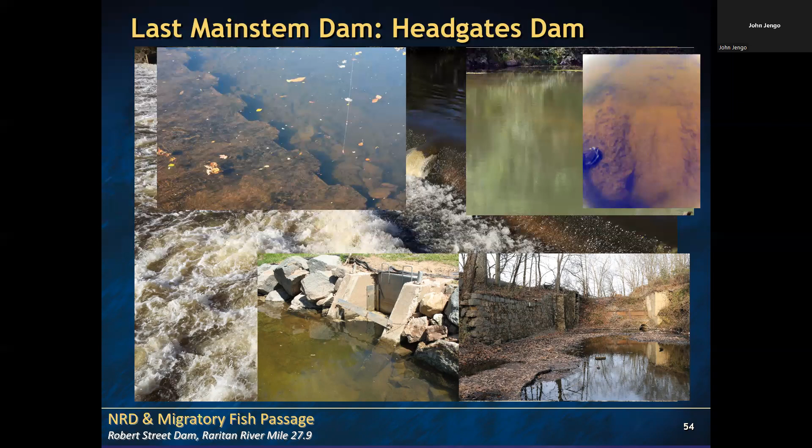To do that, I'm speccing out, perhaps drilling a water supply well and pouring that water into the canal, because once the dam is removed, the water flow into this canal will dry up.

And if you don't want to write down all these things, if you just write down my name, YouTube, and dam removals, these videos will come up.

Oh, thanks so much for that presentation, John. It was really interesting. If I had my volume on, you would have been hearing my woes and wows. We do have plenty of questions on the chat. I don't know if anyone wants to ask them themselves or if you prefer me to run through them.

I believe, Deborah, you asked the first question. Would you like me to just run through it, or are you okay asking the question?